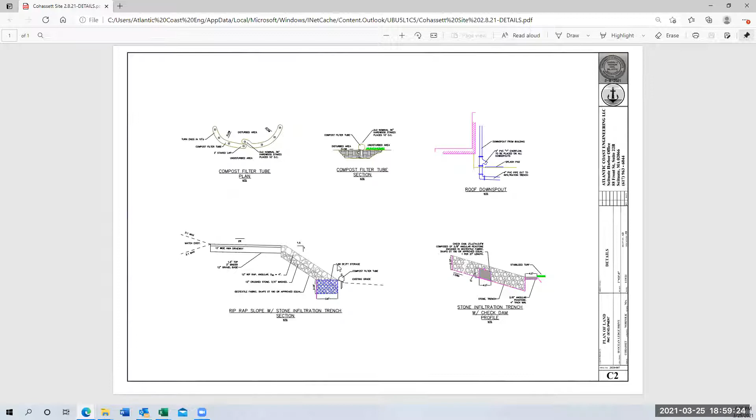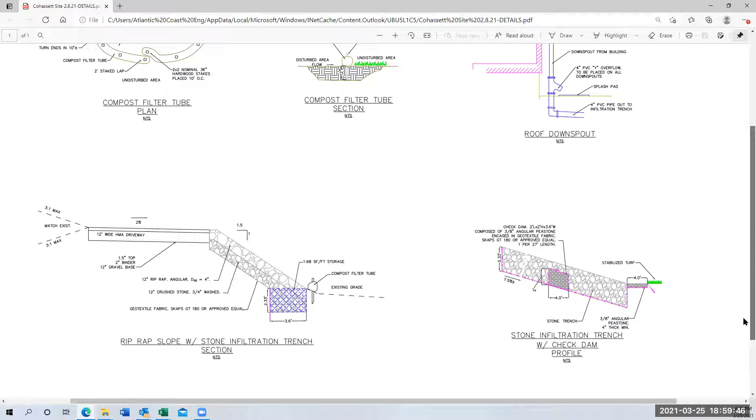And I don't know if everybody has the detail of the riprap slope with the stone infiltration trench, because if I understand it, there was some maybe concern of the water filling up and backing up maybe onto the driveway. So as Jed stated, we've prepared the stormwater plan with the 10 stormwater requirements of the DEP stormwater management, and it does comply with the recharge and the volume and the first flush and everything. But if you look at the only volume that we're really taking into account is the trench at the very bottom of it. You can see it says 3.6, 2.33 — in reality, there's much more storage within that riprap, being that you get 40% voids within that. So the only volume we're really taking account for, that meets the requirements, is at the very bottom. And you can see the grade difference between where you're getting the storage and the driveway — there's really no chance that it would ever back up that far to meet the driveway.

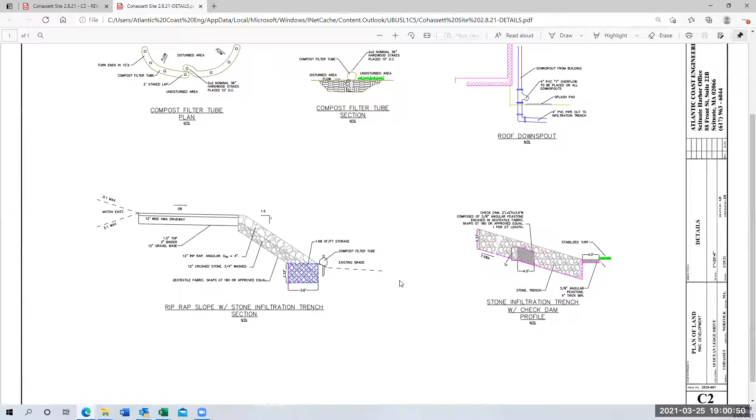So I'm looking at the actual stone infill trench section, and it looks like there's a 1 to 1.5 rise to run on the riprap wall with the crushed stone underneath. That does infiltrate, or angles down to the little less than 2 square foot storage area. It looks like the trench is about 3.5 feet wide and 2.5 feet high, give or take. And so you've got a geotextile fabric underneath there as well — assuming that the fabric is going to keep the riprap wall in place and also help with infiltration, moving that water down to the trench box. I mean, really the intent of the fabric there is for separation — separation from the stone to the earth below, just so there's no mixing of it. That's really the only intent of it. So it's really just to keep the stone separate from the fines and the silt, and keep it clean so that water can continue to run through it.

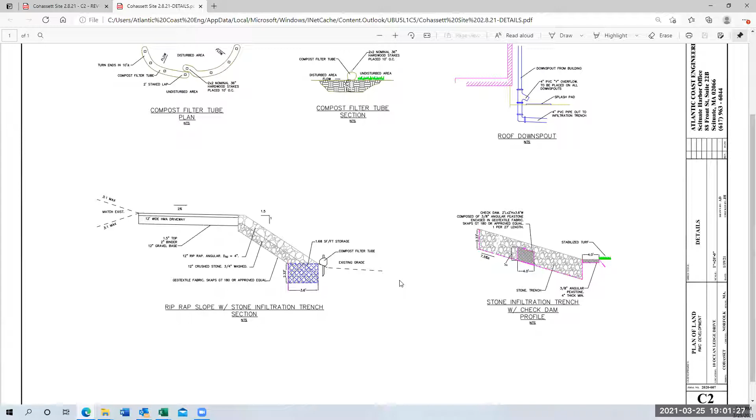So I just see the 2% slope in the HMA driveway and the slope of the site as a whole — the water will eventually make its way to that riprap slope and then trickle down eventually into that storage area, where we obtained the required storage in excess of it.

Was there any thought about stormwater? In most, if not all, of our homes built in Cohasset, I understand there's a lot of ledge on this property, so there are some difficulties there. But what we typically see is infiltration chambers. I know there's a lot of ledge, but there does seem to be some area on the backside of the driveway, in the top left, where it does appear there might be some area for an infiltration chamber. Did you consider that at all?

Absolutely, I did consider the structural approach you're describing, infiltration chambers. But because of the grade change and the way this property is set, we already basically had to build up that slope. I saw that as an opportunity for a more non-structural, green approach, to not introduce structures that may clog or fail, and just utilize the part of the design we already had to do for the driveway and site work, incorporating that into the drainage. But as Jed said, we could absolutely consider a different approach.

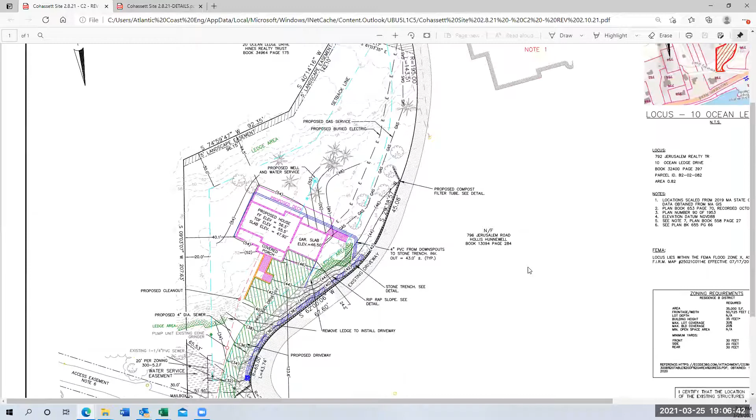I also wondered if you had considered co-sharing the existing driveway and coming in through the garage slab from the right-hand side. It's a lot of ledge that you're removing, and I wondered if that had been considered instead of going straight through the ledge at such a high degree.

So Ryan Conley, if you're on the call and can hear this, from a deed and ownership standpoint, that existing driveway that parallels the proposed driveway, can you speak to the deed and ownership rights on that driveway? I believe you don't have access rights to it. Is that correct?

Who was that you were talking to? Ryan Conley. Let me see if I can get him in. Ryan, I think you're on mute, if you unmute you should be able to talk. Yes. Ryan, did we lose you? Or Leah Popolarski, can you hear us, Leah? Ryan's in, I think you're just muted. Okay, Ryan.

Yeah, so we don't have access to that, it's a private driveway. So that's the reason why we put the driveway where it is. Okay, thank you.

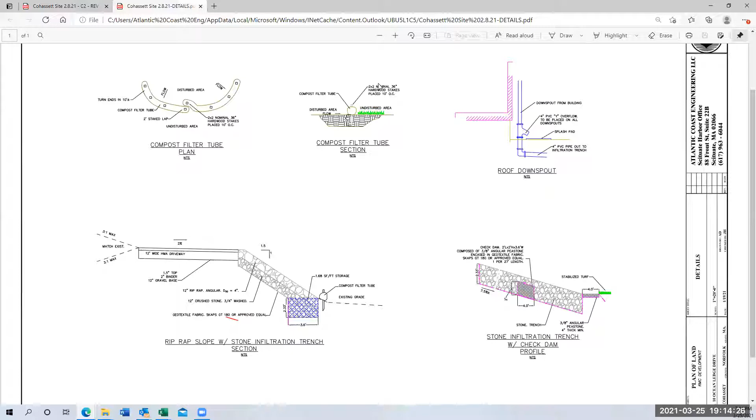Yes, I can follow up, thanks. Am I muted? I'd like to comment that DPW doesn't flush all of these catch basins on the private ways, and I believe Ocean Ledge Drive is a private way. If Howe Road is any example, I've never seen them do ours in 10 years.

So I'd also question how large the pipe is between the catch basins and Straits Pond, and whether they're adequate to handle even the existing runoff.

Yeah, I believe the pipe size is 8-inch, what we installed all along Ocean Ledge Drive. The question is the size of the pipe — it's great to have an 8-inch pipe, but if it's only a 6-inch pipe from the last catchment to Straits Pond, the lower catchment basins are going to be fountains, not catchment basins.

Right, I can confirm what size — I believe it's 8-inch though. All the way to the pond? Yeah.

Is it RCP, Ryan? Reinforced concrete pipe? I'm not too sure. Okay, is that actually a town catchment basin?

If you look at the catchment basins on the private ways in this neighborhood, you'll see large grates on many of them, and very small 12-inch square grates on many others. The smaller ones would be the older ones installed maybe 100 years ago, and most of those do not work.

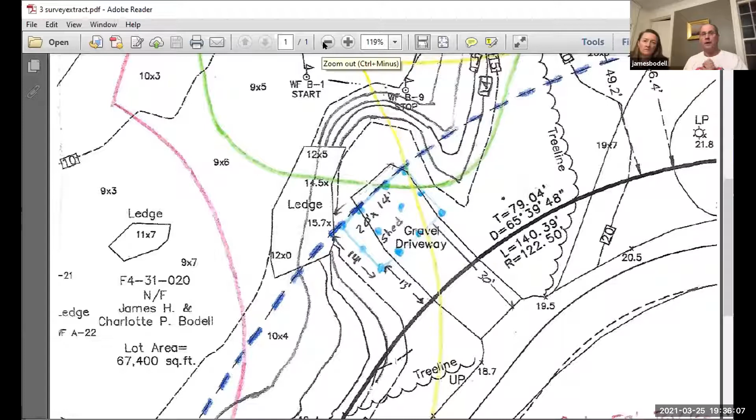So what I've done is I've color coded the lines. The yellow line that you see is the 100-foot buffer from Straits Pond. The red line is the 50-foot buffer from Straits Pond. And the green line is the 25-foot buffer from the isolated vegetated wetland. These lines are from a certified survey from Nantasket Survey, which I also included because I don't think I submitted it as part of the original packet. So if you want to see where it is on the full property, that has also been submitted. You can zoom out if you'd like to see where it is in the grand scheme of things. That's up to you.

So you can see the house in the upper right. That was where it originally was. So what we've done as a result of the last meeting, we've actually made a couple adjustments to our proposal.

The original shed adhered to the setback line. So the front of the shed was actually on the blue dotted line. And that put 90% of the shed into the 25-foot buffer.

The proposal we have now is we've reduced the size of the shed from 20 feet by 15 feet to 20 feet by 14 feet. So we've made it shallower, and we've moved the shed forward, so the back of the shed is now on the setback line.

This has removed almost probably about as much of the shed as we can from the buffer. We still have, I think, about 18 square feet that still exists in the 25-foot buffer, as opposed to the whole 280 square feet.

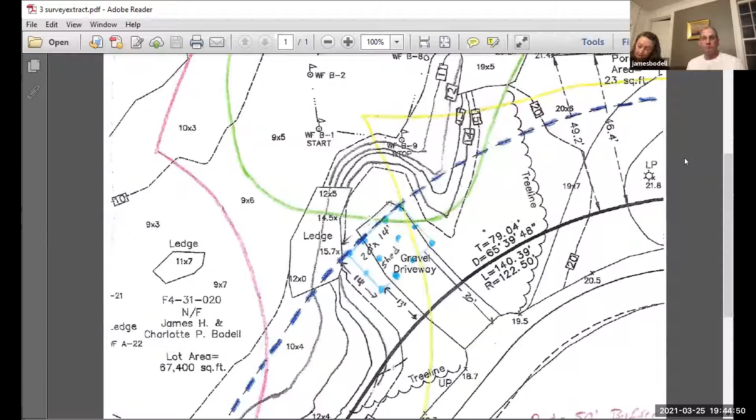We can agree to that. Jeff, do you want to see a plan as far as where the approximate locations are going to be? With just a little quick drawing with a couple X's to show the approximate location? I don't even think I need that. I think if we just say along the back edge of the shed, it's going to be somewhere in this area, anywhere in there will be fine. There's pretty much nothing growing there right now, just prickers or whatever.

Is there any further comment? So Jeff, would this be a negative 3? Yes, a negative 3 with the 2 conditions I mentioned. So if there's no further comment, I'd like to make a motion to issue a negative 3 determination for the project at 30 Whitehead Road with the following conditions: one, that before any construction is underway, a silt barrier be installed suitable to the conservation agent's acceptance; and secondly, that 5 winterberry trees be installed with appropriate spacing, minimum 2 feet in height, along the back edge of the shed.

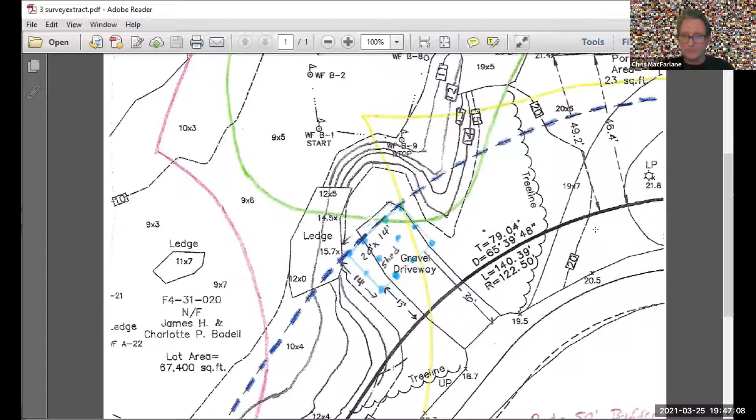Thank you. Okay, Mr. Bodell, you're all set. Thank you very much. I'll have to issue the permit via certified mail, so keep an eye out for that. All right, thank you very much. Thank you. Thanks.

Our next application tonight is a new application, so I'd like to read it into the record. This is lot 25 on Whitehead Road. In accordance with Massachusetts General Law Chapter 131, Section 40, the Cohasset Wetland Bylaw, and the Cohasset Stormwater Bylaw, the Cohasset Conservation Commission will hold a public hearing on Thursday, March 25th, 2021 at 6:30 p.m. via remote participation on a Zoom platform for applicants Brian Doherty and Nick Robert, for Notice of Intent 21-13, Stormwater Permit 2110, to construct a new single-family dwelling with associated landscaping on property located at lot 25 Whitehead Road.

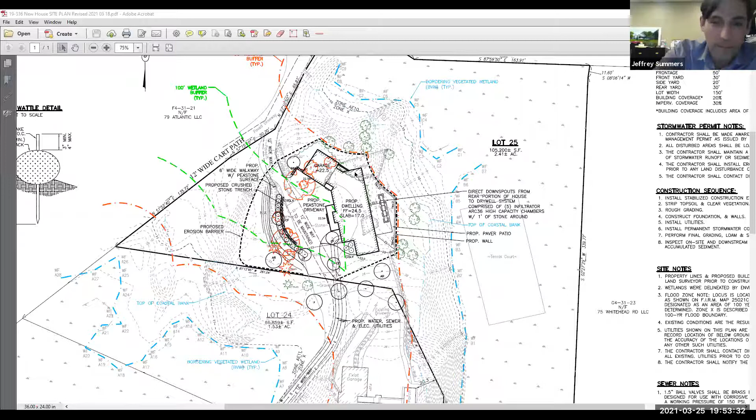Jeff Hassett, this is Maryanne Wetherall. Could you point out where the trench is on the peastone driveway? Perhaps, or can you also blow up this image so we can see it better?

So the existing driveway comes in right here, and then this is the peastone area. So when the driveway gets reconfigured, there'll be a stone trench here, and then a stone trench here. That stone trench is 2 feet wide by 2 feet deep, I believe. It's basically a reservoir. In addition to that stone trench, the entire driveway is stone.

And where's the infiltration system that you pointed out? The infiltration system is right here. Oh, okay. So that's going to capture the runoff from the rear of the house, downspouts at the back.

And it's not so easy to reconfigure that way legally. So it's going to remain, and anyone who has rights to it can continue to walk through there or go through it in any way they would like. But what the homeowners are going to do is plant a privet hedge right here and basically try to encourage people to take the alternative route so they would both have their own privacy.

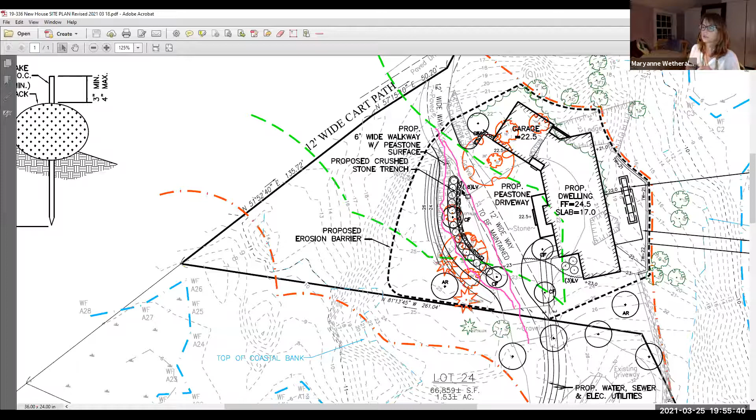But this 12-foot wide way does connect to, I think it actually connects this way and then goes up to, and then they have access all the way to the beach. And the reason the 12-foot wide is so they can carry a canoe or whatever it is, and they can go all the way up to the beach.

Okay, yeah, the bottom line though is that way is not going to be altered or blocked. They're adding this path so it feels like this is a little more private. Yeah, okay, thank you.

Jeff Hassett, what makes this an actual buildable lot? Because as you remember, the project that shares the existing driveway coming in was in front of us not too long ago, and it appeared that this was all one central lot, and now it seems like it's two separated lots here.

Yep, so these two lots have been in common ownership. This lot we're looking at now was actually endorsed by the planning board as an ANR subdivision in 2017. It's registered land, which means it also had to be approved by the land court, which they did go through that process.

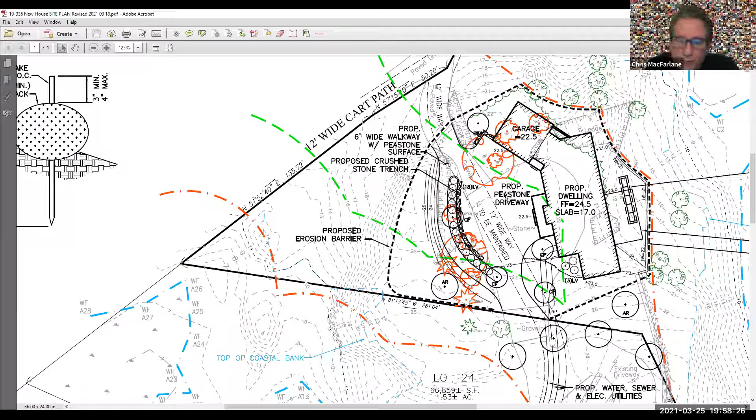Jeff, can you zoom in to the 4 trees that are being removed? And I want to see what the grading is doing there, if I may.

So right now you've got, let's see, there's a 23. What's the 24 contour doing? Oh, it's going there. 24, 22.

I'm just wondering if the grading couldn't fit in a little more naturally and potentially save some of the trees that are there. Or, there is a piece of ledge here that needs to be removed.

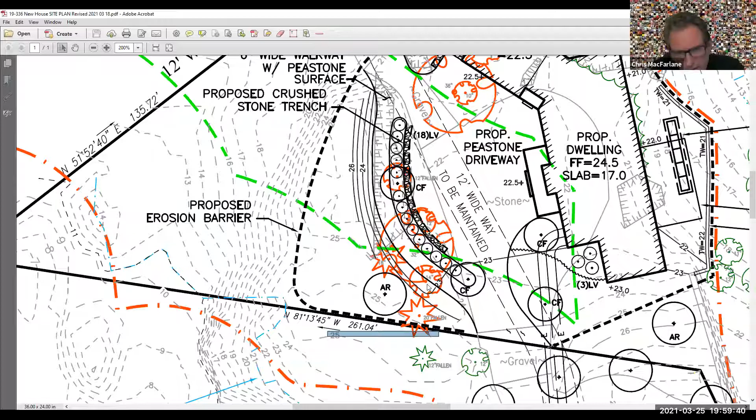So you are removing some ledge close to it. But you've probably got to keep this—it looks to me like that very large 32-inch tree is sitting on a 24 contour. And you've got a 22 all the way up at the other end. That's a pretty long distance you should be able to get from 24 to 22 without taking that tree out. Now I can't speak to the health of that tree, but I do see a 20-inch which it says is fallen, so that's understandably being removed.

The other—certainly the 3, the pine, the 14 and the 32—it seems like it might be possible that those get saved unless they're in terrible shape. Do we have a picture of that, Jeff? Yeah, I was just looking.

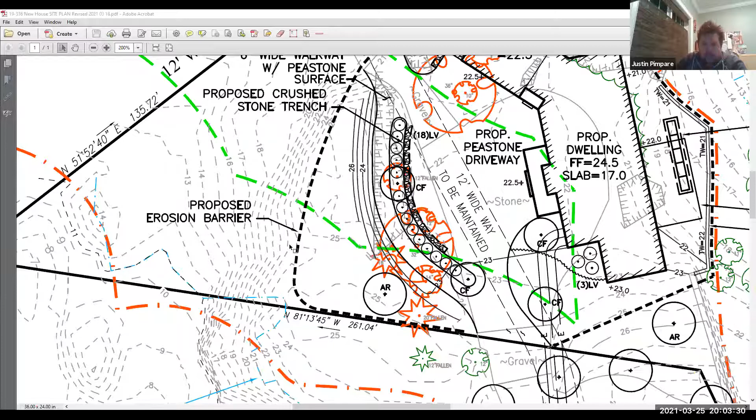Okay, can we put the plan back up there again? I had a couple questions on the infiltration system and pavers and the wall and a few other things while we're at it. If you could scroll to the back side of the property, please, out to where the infiltration chambers are.

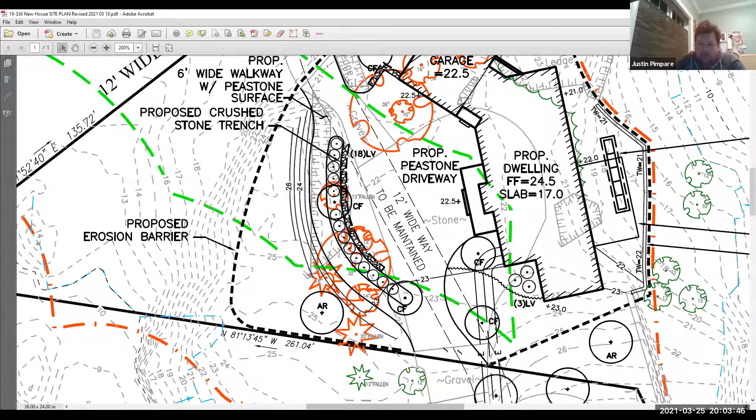The font is great there, but just go a little further so we can see where the arrows point to for the narrative. I'm going to zoom out a little bit then. There we go, all right, that's good.

Thank you. So the direct downspouts from the rear portion of the house—you're saying the rear portion of the house. Is it capturing the entire house here? This has been my pet peeve on a lot of projects here. What we see is a top view of the actual house, but we don't know how many different pitches are going on with the house. So when someone says they're capturing all the runoff, we're assuming they're capturing all the runoff.

So what you're saying here is the rear portion of the house—what portion of the house is actually being captured as far as stormwater goes? Sure, so I would picture a downspout here, maybe one here, and another one over here, and they would all connect with a pipe running right along the foundation, tying into the system.

So what about the front of the house? So the drywell only captures the rear portion of the house. It does call that out in the note. Right, the front of the house, the downspouts are going to daylight to the ground as if there was not an infiltration system. But then the runoff continues across this flat pea stone driveway where you'll get a lot of infiltration. And if the water runs across that driveway, it goes into the stone trench here, another stone trench over here.

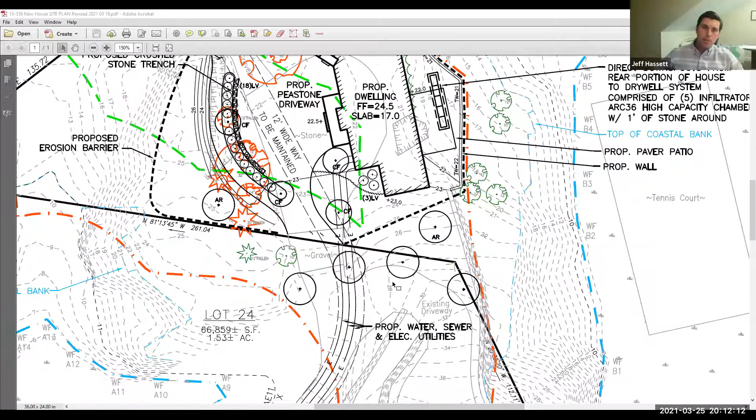Jeff, this is Maryanne Wetherald. Are these the type of boulders that we usually see? I think it's the Toll Brothers properties, those big boulders - is that what we're envisioning here? I'm not familiar with that. What they'll look like is the property next door, if you recall, had some boulder walls along the driveway. The intent would be that they'd be similar.

Okay, then I support Jay's recommendation to outline that much better because I'd like to know what that is more. Okay.

Kathleen, Patricia, Eric, any other comments? No comment. Nothing further, thanks, Chris.

So Jeff, I think you heard my comments as far as trying to save trees and maybe looking at a little more natural buffer there. And I think you've heard Jay's comments as far as that wall's concerned. And then there was the comment about whether the downspouts out front, whether the best solution is daylight or whether it's actually to have another chamber of some sort out front.

Are you okay with continuing this hearing and addressing some of those conditions?

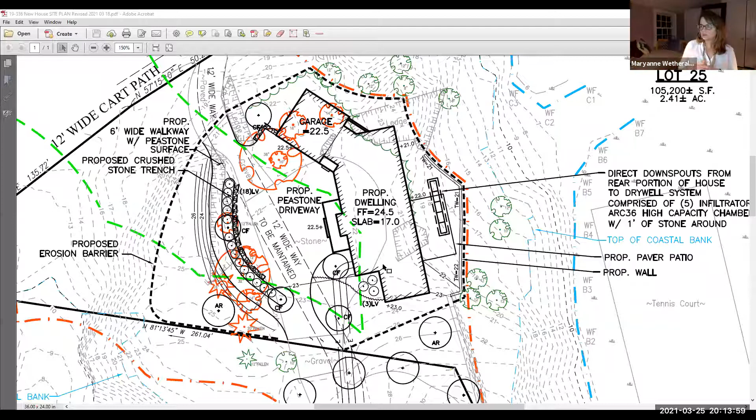Yes, please. Could we continue it for 2 weeks? Any chance you'd consider continuing it for 4 weeks? I'm okay with that. You are okay? The owner's okay? Yeah, okay, I think it'll take a little bit of time to coordinate with the landscape architect.

Okay, great. Then we're going to continue this hearing until April the 22nd. Okay, great. Thank you, everyone. Thank you, Joe. Thank you.

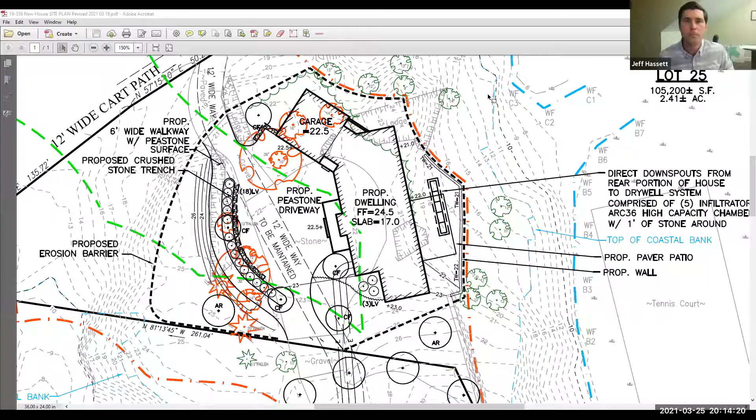Okay. Our next applicant is at 15 Diab Lane. This hearing is a continuation from March the 11th. This is RDA 21-02.

And yeah, there's nobody here to represent this project. I'm going to suggest that we just continue it for 4 weeks. Jeff, can I just ask what exactly it is, why are we, what do we have without - and I understand the applicant's not here, but what is in front of us here?

So I think you guys remember in 2017, unfortunately, we do - yeah, the 3 houses on Diab Lane, I think there are 3, I don't remember the house numbers, 3, 9, and 15, I think, Diab Lane. So, as you know, the stormwater permits don't expire.

They also filed an RDA for a little bit of work in the 100-foot buffer zone to the wetland on the other side of Howe Road. So the wetland buffer zone maybe goes like 10 feet onto the property where they want to build. So the determination for the RDA is only valid for 3 years, and that's expired. So now they're before, or who knows where they are now, but eventually they're coming before us with the new RDA for the same plan - basically the same exact plan that was approved 3 years ago.